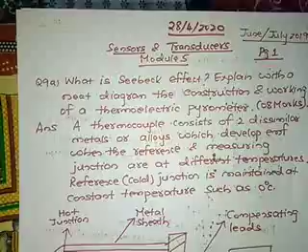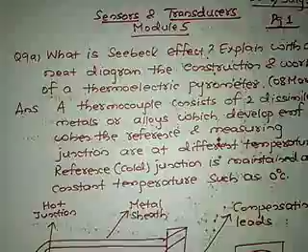In continuation with solving previous year question papers, today's first question: what is the Seebeck effect? Explain with a neat diagram the construction and working of a thermoelectric pyrometer. This question is asked for 8 marks. First they have asked what is Seebeck effect, then to draw the neat diagram with construction and working of the thermoelectric pyrometer.

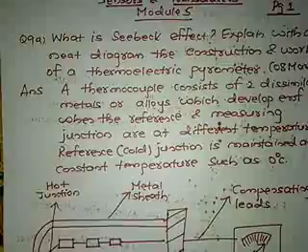This Seebeck effect is related to thermocouple. A thermocouple is a device consisting of two dissimilar metals joined at two junctions. Each conductor has two ends - the starting ends are joined together and the finishing ends are joined together. One junction is maintained at high temperature, called the hot junction. The other junction, maintained at lower temperature, is called the cold junction.

Usually the cold junction, or reference junction, is maintained at 0 degree Celsius. When such a setup is maintained, a voltage develops in the circuit and current flows. This effect is called the Seebeck effect.

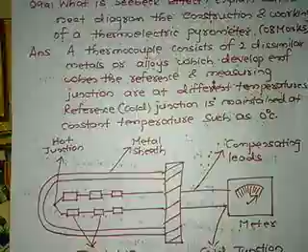Next, to explain the thermoelectric pyrometer - this is the thermoelectric pyrometer. Here we can see there is a hot junction and a cold junction. In between there are insulators to ensure external current does not interfere with the conductors, the wires here. Similarly, there is a metal sheath enclosure to protect the equipment from extraneous signals.

Then there are compensating leads to provide the required compensation. If there is an over-temperature, that compensation is provided by the compensating leads. Then there is a meter connected to measure the voltage or the current.

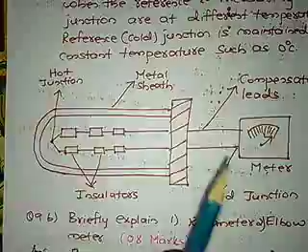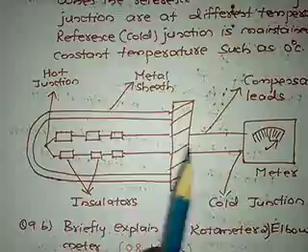When the two junctions are maintained at two different temperatures - one higher, one lower - the one at higher temperature is called the hot junction, and the one at lower temperature is called the cold junction. Then voltage develops in the circuit, and because of this, current flows in the circuit, which is measured using this meter.

By measuring this current, we are able to measure the temperature of the junction. So this setup can be used for measurement of high temperatures. This is the setup for the thermoelectric pyrometer.

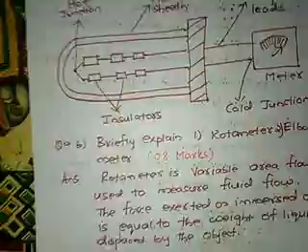Moving on to question number 9B: briefly explain rotameter - first one, and elbow meter - second one. This is asked for 8 marks.

Rotameter is a variable area flow meter used to measure fluid flow. The working principle of the rotameter is that the force exerted on the immersed object is equal to the weight of the liquid displaced by the object. This is the working principle of the rotameter.

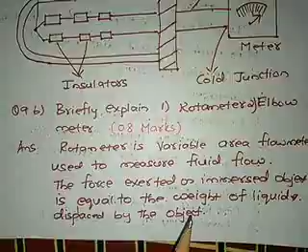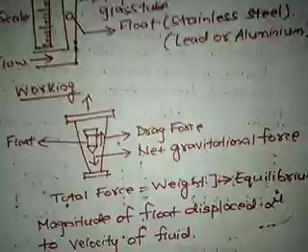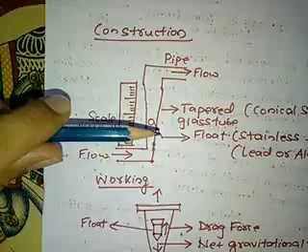Let us see the construction of the rotameter. Here we can see the inward flow and the outward flow. There is a scale placed here to measure the level of the liquid in this tube. This is a glass tube, tapered in shape, of conical shape, and inside this glass tube there is a float. This float is made of stainless steel, lead, or aluminum material. As the liquid flows, the float gets displaced.

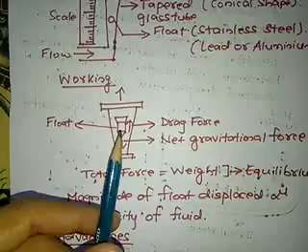Let us see the working of the rotameter, using this figure to explain. The flowing liquid exerts force on the side walls of this float, and there is a force exerted in the downward direction due to the gravitational force on the float.

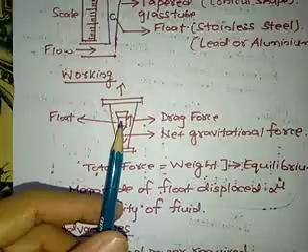When the total force exerted becomes equal to the weight of the float, the float reaches its equilibrium.

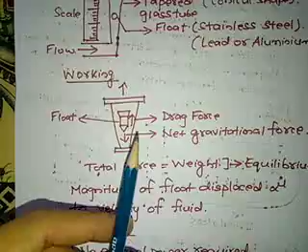Then how to measure the velocity of the fluid? To measure the velocity of the fluid, we use the magnitude of the displacement of this float. Magnitude of float displacement gives the velocity of the fluid, that is, it is proportional to velocity of the fluid.

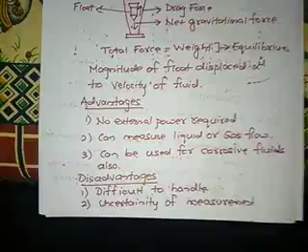Advantages of this rotameter instrument are: no external power required. It can be used for measuring liquid flow as well as gas flow. It can also be used for measurement of flow rate of corrosive liquids, corrosive fluids, acidic fluids.

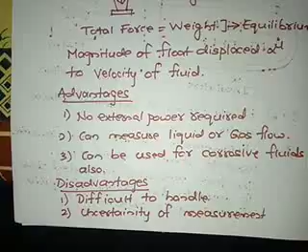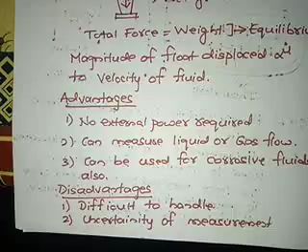Disadvantages are: it is difficult to handle and there is uncertainty in measurement, because it is complex and the measurement completely depends upon the movement of the fluid, so it is uncertain. These are the disadvantages of the rotameter.

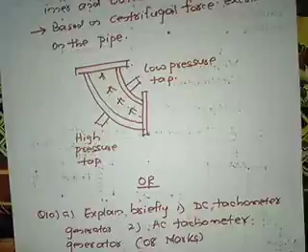The second one is elbow meter. Elbow meter is a device used to measure flow rate of liquid through the pipe.

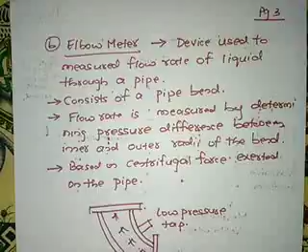This elbow meter consists of a pipe bend. We can see in this figure, this elbow meter is in the form of a bend, it is bent here. This form of a bend is called as a pipe bend. The liquid is flowing through this.

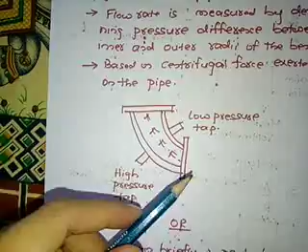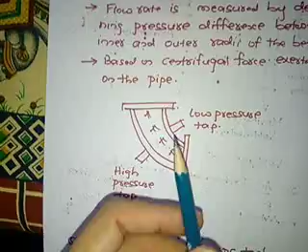The flow rate of this liquid can be measured by measuring the pressure difference between the inner radius and outer radius. That is, if we measure the differential pressure between inner and outer radii, we will be able to measure the flow rate of the liquid moving through this pipe bend.

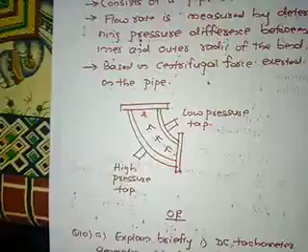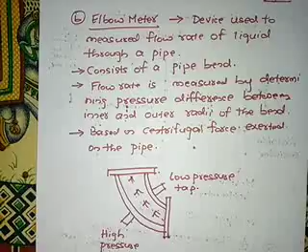I hope you are following, students. This is how we measure the flow rate of the fluid flowing in the elbow meter, using the principle that the centrifugal force exerted by the flowing fluid on the pipe, that is the differential pressure exerted on the walls, is proportional to the flow rate of the liquid which is flowing.

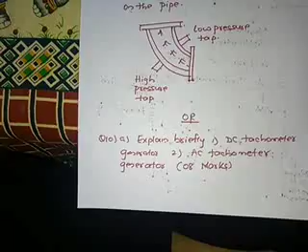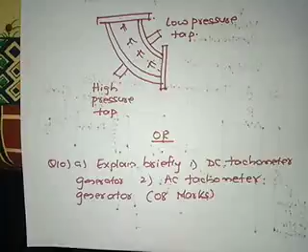Let us see the next question, question number 10a: briefly explain DC tachometer generator and AC tachometer generator. This is asked for 8 marks. First one is DC tachometer generator, second one is AC tachometer generator.

Let us see the first one, DC tachometer generator. This is how the diagram is. The DC tachometer generator consists of two permanent magnets, north and south. In between, an armature is placed, or the rotor is placed.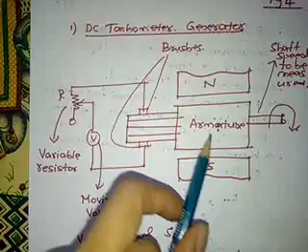This armature is coupled to the shaft whose speed is to be measured. So when the rotating object is coupled to the shaft, when the object rotates, the shaft also will rotate.

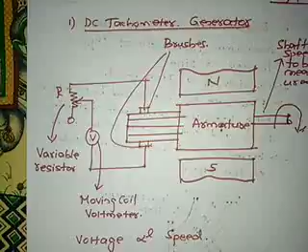So when this shaft rotates here in the magnetic field between the north and south poles, according to Faraday's laws of electromagnetic induction, whenever the flux linking with the conductor changes, EMF is induced. This EMF we are measuring using the voltmeter. The current in the voltmeter is limited by this resistor, and the brushes are used for collecting the current from the armature.

If the voltage is measured, then indirectly it is calibrated to measure the speed of the shaft. So this is how DC tachometer generators are used for measurement of the rotating speed of the object.

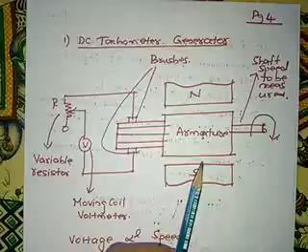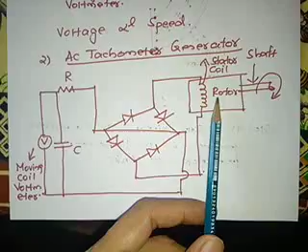Second one, AC tachometer generator. Here as we can see, first we are using the rotor. There is a rotor here, and there is a stator. The rotor is rotating whereas the stator is stationary.

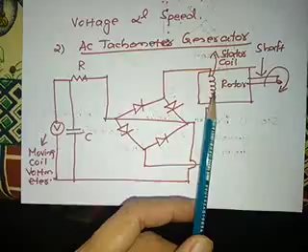This rotor has a shaft which is coupled to the object which is rotating. So when the object rotates, the shaft also rotates, and the rotor rotating will cut the flux lines, inducing EMF in the stator coil.

This EMF induced in the stator coil, which is AC, is rectified to DC by this bridge arrangement, a diode bridge arrangement, which converts the AC input signal to DC output voltage. So the output that is obtained is DC.

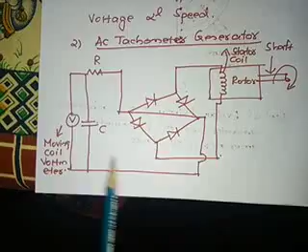This DC voltage current flowing due to the DC voltage is limited by the resistor, and unwanted ripples in the DC voltage are eliminated by this capacitor. It's a filter, so it removes the unwanted ripple present in the DC voltage. Finally, by measuring the output voltage, we will be able to measure the rotating speed of the object. So the AC tachometer generator is used to measure the speed of the rotating object indirectly by measuring the output voltage.

Next question, question number 10b. Let us see what it is. Explain piezoelectric accelerometer and ultrasonic liquid level gauge. Similarly, it is asked for 8 marks.

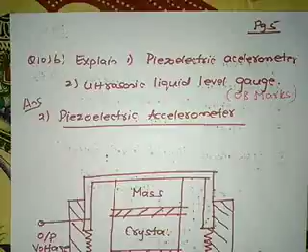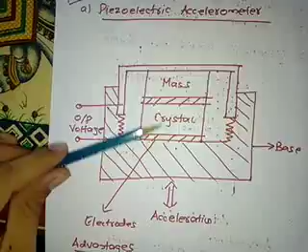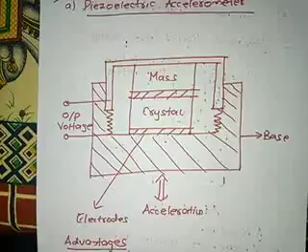This is the setup for the piezoelectric accelerometer. We have the mass placed on the crystal. The crystal is sandwiched between the electrodes. The arrangement of the mass and the crystal is fastened to the base, bonded to the base. Acceleration, whatever we want to measure, is applied to the base. This acceleration squeezes the crystal.

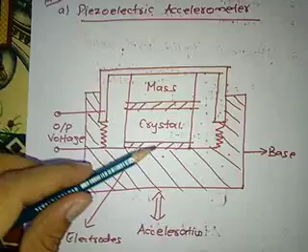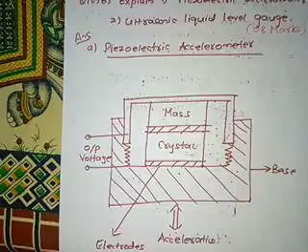When the crystal is squeezed due to change in pressure, the piezoelectric crystal converts the change in pressure to output voltage. By measuring this output voltage, we will be able to measure how much acceleration is applied. So the piezoelectric accelerometer is a setup to measure the acceleration of a moving object in terms of output voltage. The electrodes present here are meant for measuring the voltage.

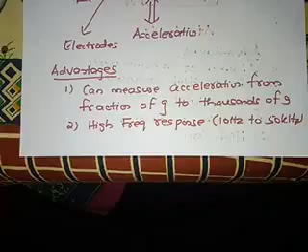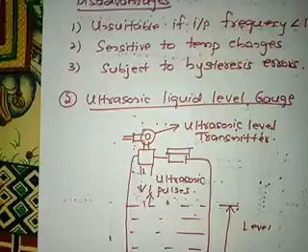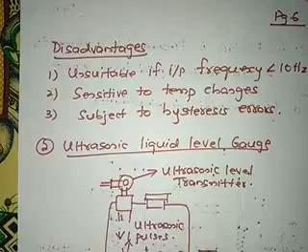Advantages of piezoelectric accelerometer: it can measure acceleration from a fraction of acceleration due to gravity to thousands of g, and has high frequency response ranging from 10 Hz to 50 kHz. It has few disadvantages also. Though it is suitable for measurement of large values of acceleration, it cannot measure frequencies less than 10 Hz. It is sensitive to temperature changes and is subjected to hysteresis errors. Hysteresis error is due to increasing and decreasing values of input giving differing output, so this is called the hysteresis error.

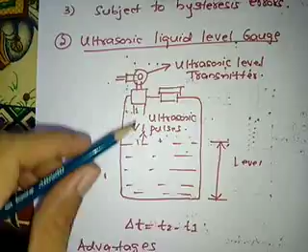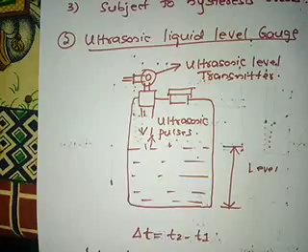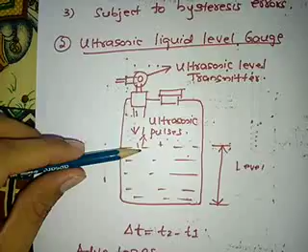Next part of the question, ultrasonic liquid level gauge. This is the setup. Here we have the liquid in the tank at a certain level. This is the ultrasonic transmitter, which transmits ultrasonic pulses. These pulses strike the liquid and return back. This ultrasonic principle uses the change in transit time, which is employed for measurement of the level of the liquid. Based on the change in level, the time taken for the pulses transmitted from the ultrasonic transmitter differs when they strike back and return, so the receiving time is different.

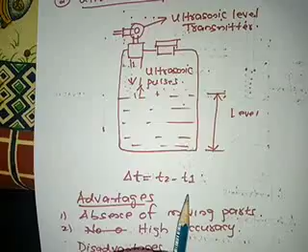So the time difference delta t is equal to t2 minus t1. This time difference is measured, and on measuring it, we will come to know proportionately how much is the liquid level in the tank. This can be easily measured. So this is a setup wherein we can measure the level of the liquid in the tank, which is called the ultrasonic liquid level gauge.

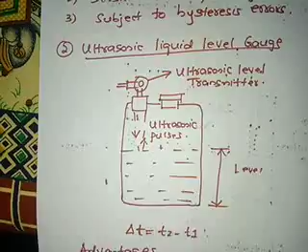Its advantages are absence of moving parts and high accuracy. Disadvantages are complex construction and high cost.

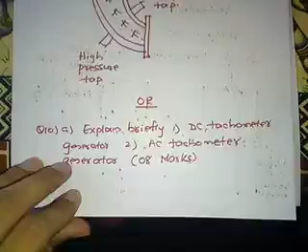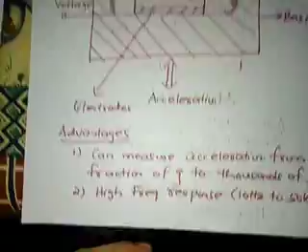So students, in today's class we have taken up different topics, starting from the Seebeck effect, thermocouple, then thermoelectric pyrometer. Then we saw two types of flow meters, rotameter and elbow meter. Then another two types of instruments, DC tachometer generator and AC tachometer generator. Then later we have seen piezoelectric accelerometer, their advantages and disadvantages, and finally ultrasonic liquid level gauge, its advantages and disadvantages.